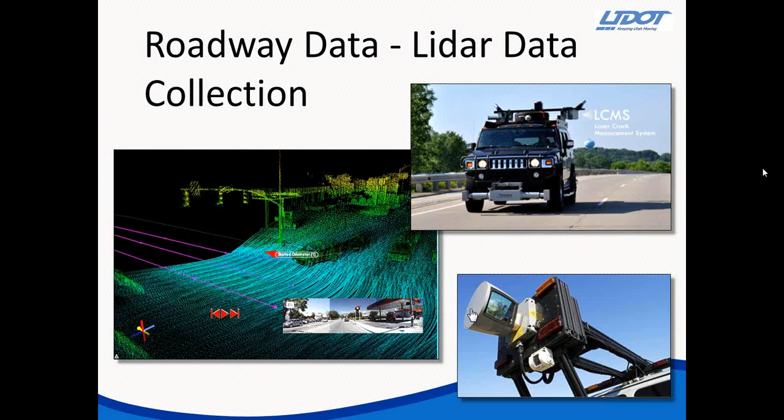We contracted with Mandli Communications. They chose to use Lidar as the primary collection tool, as well as some high-resolution right-of-way imagery as part of the data collection process. After the successful completion of the 2012 data collection, we've just completed a 2014 round of data collection, and we plan to continue on a two-year data collection cycle into the future.

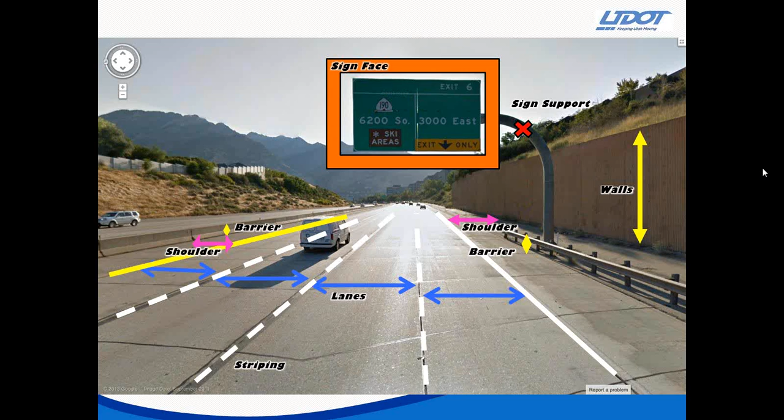To give you an idea of some of the roadway and roadside attributes we've collected with this project: we geospatially located all of our barriers, our shoulders and shoulder width, lane lines, lane width, sign faces including a description of the foundations and connectors, walls, wall heights and locations, median width, surface areas, location of rumble strips, all the pavement condition information, and roadway geometry.

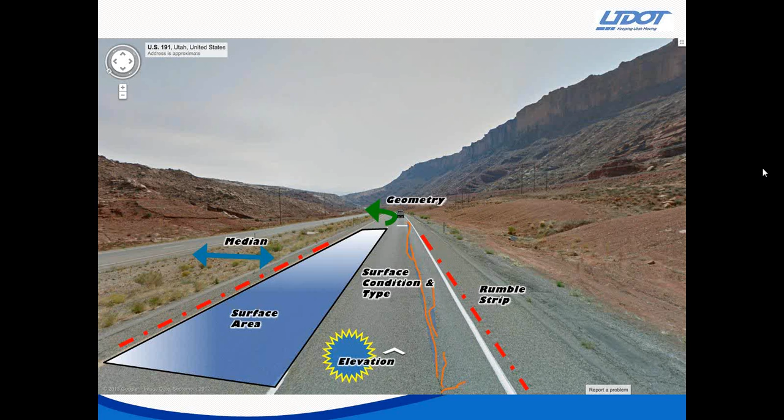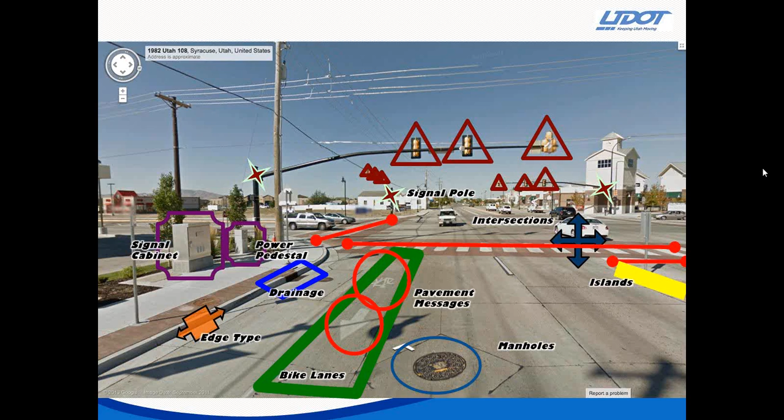Then in the urban environment, of course, things get very complicated and complex with intersections, other pavement messages, signal head locations, signal cabinets and power pedestals, drainage features, and curb and gutter. I think I've mentioned everything displayed on the picture.

So we took all of this data that we've collected and we've created a data portal. This is fashioned after the data.gov website. We've got our own version for Utah.

You can download these data sets as Excel spreadsheets, shape files, KML, KMZ, data dictionaries, and the metadata behind the data collection process—everything we could think of that we could provide is available here. And this is all available to the public as well. You're welcome to browse this at your convenience and take a look at what we've got.

We also display the information graphically in UPlan. UPlan utilizes the ArcGIS online data portal. We recognize the need to display this geospatially as best as we can in order to tell the story.

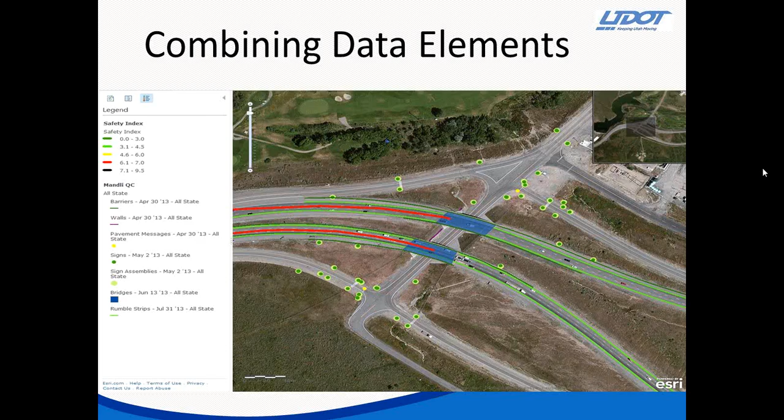So with that background, I'd like to talk a little bit about what we've done with shoulders. We did a systemic analysis of our state network to identify where we have deficient shoulders and where we might consider the prime locations for doing shoulder widening projects. Utah, by lane mile, is a fairly rural state, and we've got a lot of two-lane rural roads where the shoulders are in a variety of different conditions.

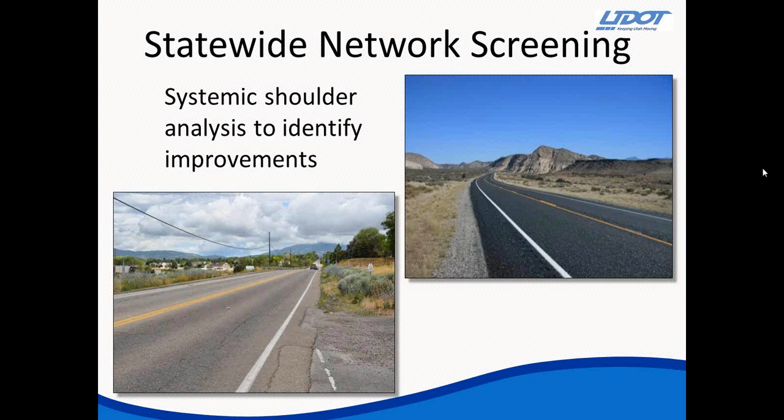Here's some examples on these pictures here. What initiated this project is one of our UDOT regions asked us for some federal HSIP safety funds to widen shoulders on a certain section of roadway, rural roadway, where they felt there was a safety concern.

And as the program manager for that program, I was concerned whether we were taking a holistic approach to looking at the entire network and truly prioritizing our greatest needs for where we should be spending our money to widen shoulders. Just as a teaser, the image you're currently looking at is the section of roadway where that region request came from. In doing our analysis, we found many of our two-lane rural roads that had a lot more deficient shoulders than what you're looking at in this picture.

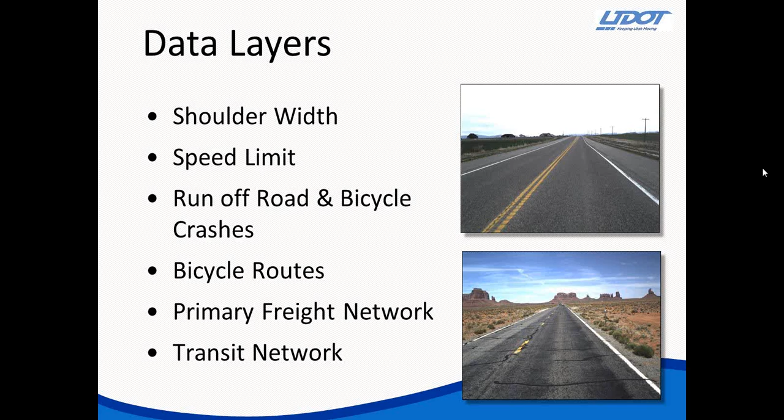So let me tell you what we did to embark on this project. We first identified several different data layers that we wanted to include in our analysis. I have a slide that talks about each of these data layers, but you can see them listed there that we identified as potential sources of information to help prioritize our shoulder widening. I'm not going to read that to you now.

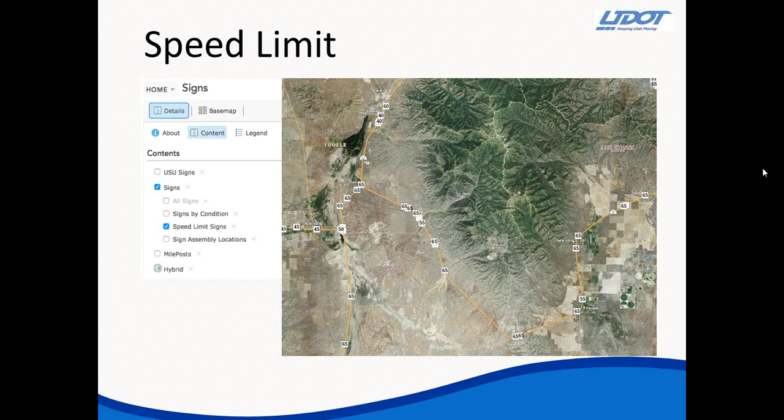We also looked at our crash data, both run-off roadway departure type crash data, as well as crashes that involve bicycles. We identified bikes as one of the roadway user types that would benefit from a wider shoulder, and so we wanted to make sure that we accounted for hot spots that may be occurring where bikes are being hit by vehicles. In this part of the analysis, we found that there were many more areas with roadway departure crashes than bicycle-involved crashes, but we used both as a weighting factor in our analysis.

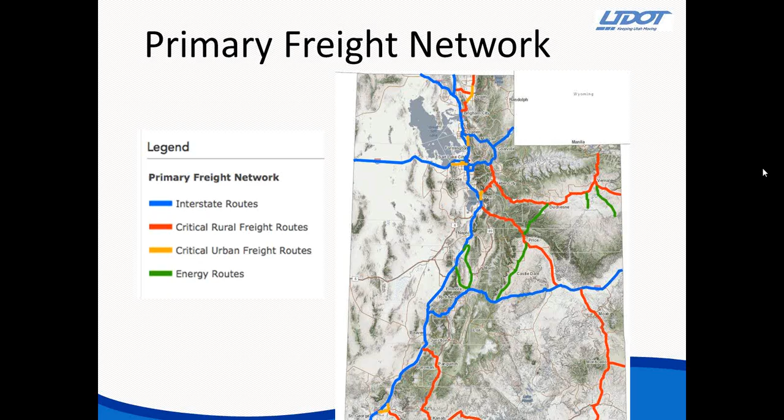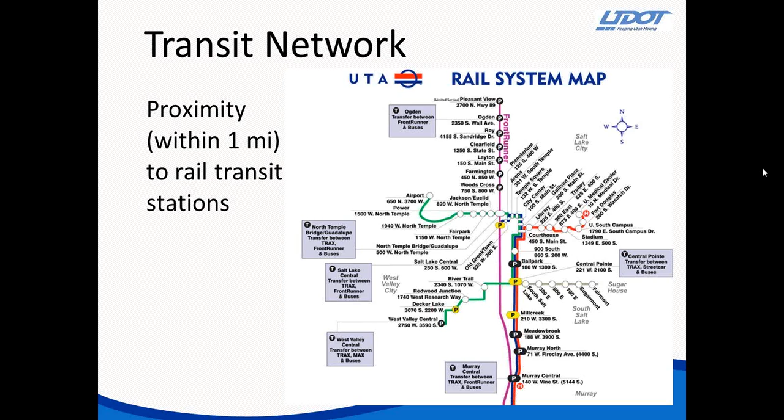And so we used this primary freight network as a contributing factor in weighting for our shoulder analysis. We also used proximity to transit stops. The theory here is connectivity between different modes of transit, specifically pedestrians, bikes, and transit, making connections between modes of travel, benefiting from good shoulder treatments.

So this slide pretty much summarizes how we combine these data layers together. We looked at our pavement sections. We identified the need to remove sections of roadway that already had existing curb and gutter. We did this for several reasons. A shoulder widening project can get a lot more complex if we end up having to buy right-of-way and shift curb, gutter, sidewalk, drainage features along the roadway. Since we were focusing primarily on shoulders, we removed sections that had existing curb and gutter, which was already identified in our Mandli data collection effort, so it was easy to remove those sections.

We also removed sections of roadway that already had shoulders over 6 feet wide, recognizing that 6 feet in some design criteria is still deficient, but for our purposes we wanted to identify roadways that really didn't have a shoulder that needed some type of treatment just to get started. We also removed areas in the urban area that had parallel facilities with shoulders, focusing on those true needs that were unique and isolated.

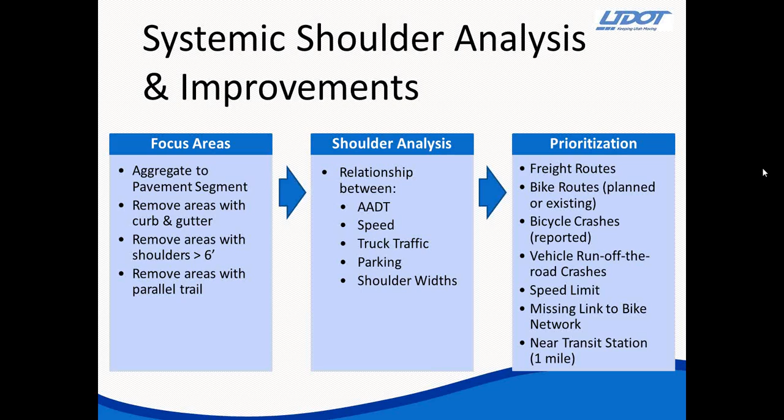So this is an output to our analysis. This is one of the corridors identified and prioritized. I'll show you a more complete list in a moment, but I wanted to demonstrate what kind of analysis and weighting factors we used. The weighting factors can be adjusted depending on what we want to focus on. This is an example of State Route 37, and how it ranked and prioritized based on those factors we talked about.

This wasn't a freight route. This was a high bike use route. There weren't any bike vehicle crashes, but there was a fair number of roadway departure crashes. Each of these scales on this scoring is 0 to 5. This was a fairly high speed road. It linked to other routes that already had sufficient shoulders, so it completed one of those networks, and it was near some transit facilities. So this section of roadway ranked very high.

Rudimentary cost analysis here for this section of road, for the areas that were deficient on the shoulders, is $1.7 million.

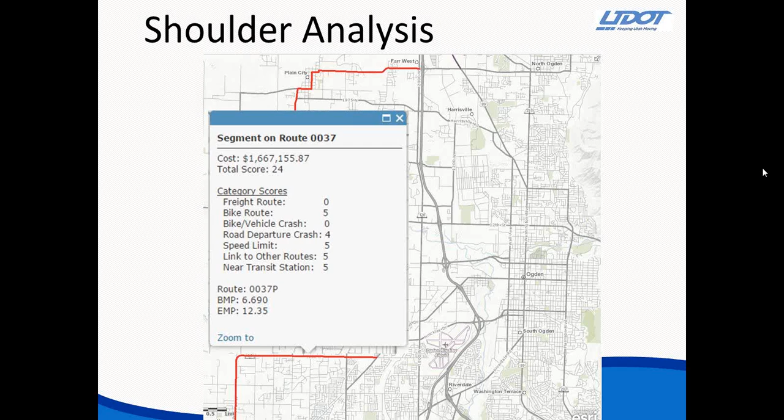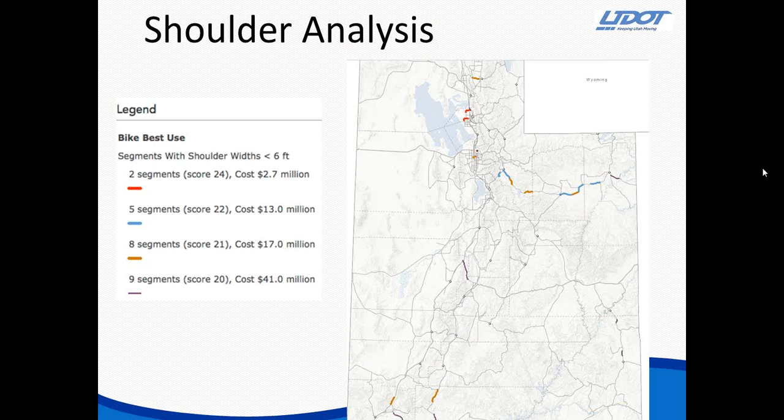Here's a map, again a UPlan map, of where we prioritize these top locations statewide, and there's some color coding here for how they ranked on that score. So this is basically the first $100 million program, if you will, of where to prioritize those projects.

One of those sections on that map was US 40, and I wanted to mention this route specifically because a significant portion of US 40 showed up in our analysis, and we thought this was really interesting. It's a pretty isolated road in the rural part of eastern Utah over some pretty treacherous mountain passes, and most of this road doesn't have any shoulders. One of the reasons this road as a network appeared at the top of our ranking was because it hit all of the key features of our ranking criteria.

High speed, it's a freight corridor, lots of crashes. It's designated as a primary bike route. There are no alternate facilities in this area for transportation.

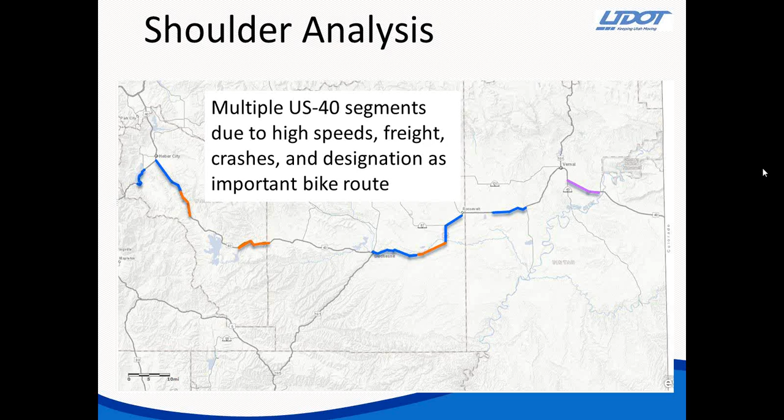And so you could see how the way we scored and chose to rank favored rural roads like this that were heavily used by trucks. By tweaking that ranking criteria, we could find ways to better optimize this if we didn't want to focus on roadways such as this.

So here's our final list that we prioritized statewide, and we created this list that we are sending back to our regions as this is what we prioritized in our analysis of the top candidates in the state to widen shoulders. Please get with your local people and let us know which of these you'd like us to consider for funding.

Lessons learned in this process. You obviously, first of all, have to start off with accurate data. We found as we went through this several sections of roadway that we had to throw out of the analysis because when the data was collected on those sections, they were under construction or otherwise had some temporary traffic control set up. So the roadway features collected at that time didn't represent what's typically on those sections. Some sections came up as having no shoulder because traffic was shifted onto the shoulder at that time to accommodate construction activities.

As with any process such as this, when we handed the list back to our regions, we had to remind them that this wasn't the final outcome of the process and that some ground truthing had to take place in order to get buy-in and to confirm that what was concluded in the statistical analysis actually bore fruit on the ground.

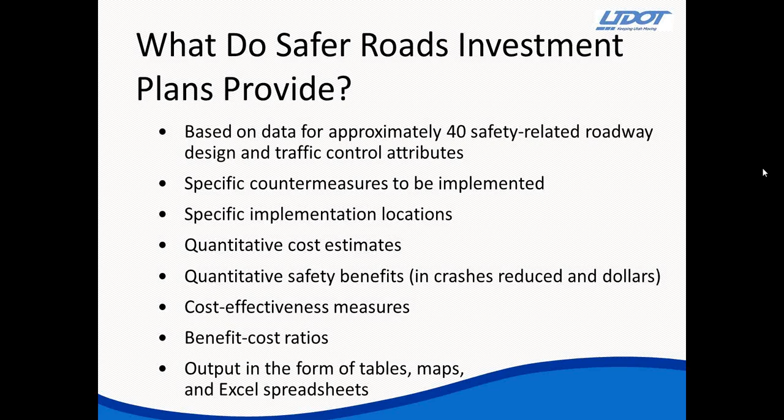So with that, I'm done with my presentation.

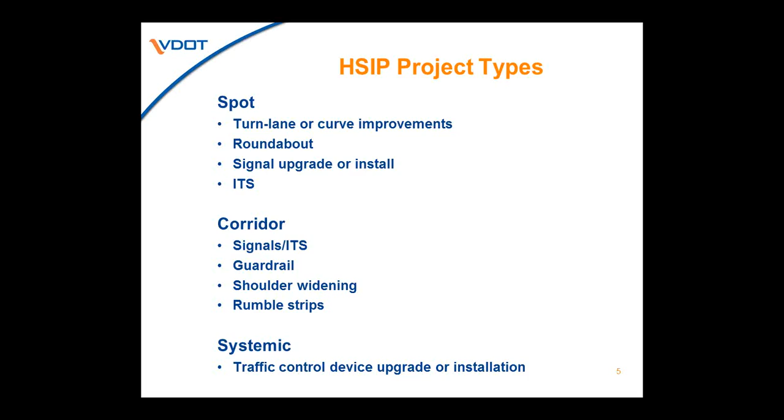So we've been working with our district folks using this umbrella approach with our strategic plan for several years now. The intent was to get them good highway safety planning data for our emphasis areas: roadway departure, intersection-related, speed-related, and bike and ped.

Although our plan doesn't identify non-motorized crashes as an emphasis area, each of our other areas is actually intertwined with strategies that address those issues, whether related to crossing at an intersection or driving along a roadway segment that has roadway departure and speed-related issues.

We've been working to improve how we share that information over the last 4 or 5 years, as we've moved from a legacy mainframe-driven linear referencing system to a more GIS-based system. That has required some of the steps I'm going to get into.

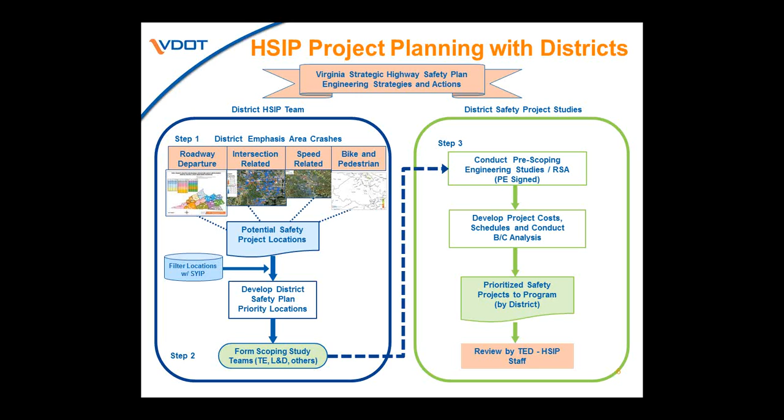One of the first things that we did in order to help the districts develop their highway safety plans is develop what we call a crash tree. Again, this is another good idea from one of the states that starts with M, who has done this down to the county level.

We developed these district crash trees, starting with the VDOT maintained system, of which we maintain 85% here in Virginia, with about 60,000 centerline miles of highway. We have our VDOT system - the green to the left is our interstate system, in the middle is our primary or state system, as it would be called in many other states.

And then on the right in the blue is our secondary system, which is our county roads. For each of those, the first decision was for our primary was whether or not it was divided or undivided. Although we had a number of lanes, and although while we had that for secondary, the preponderance of the centerline miles is 2-lane roads, right down to the subdivision cul-de-sac. So for our primary system, we pulled our number of lanes out of our inventory, and then we started to look at the distribution of crash types.

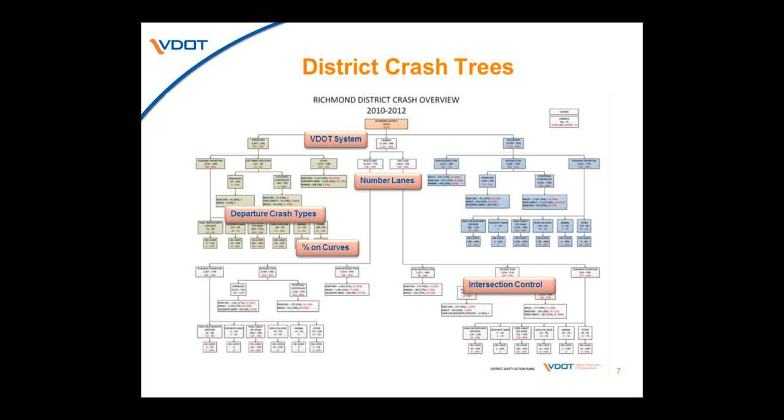So while we were changing from having this legacy sort of mainframe crash and inventory system, we were able to take the data sets out of there and start to work with crash frequencies. As Scott did for his shoulder work, we started back with looking at where were our emphasis area from our strategic plan crash frequency issues. Our old legacy mainframe generated reports for intersections and roadway segments that had an above average crash rate using the critical crash rate method.

As we were transferring to a completely GIS-based enterprise system, we went back to a frequency method. Our approach was to look at those intersections and roadway segments within each county. So what we did was we percentiled the total crashes and the severe crashes for those at both intersections and for the roadway departure, speed-related, and bike and ped. For all but bike and ped, we tended to look at the top 85th percentile for the route length within that county or the 250-foot radius around an intersection node. For bike and ped, we quartiled those so that we could get enough frequency in each data range to look at which routes had those non-motorized crashes.

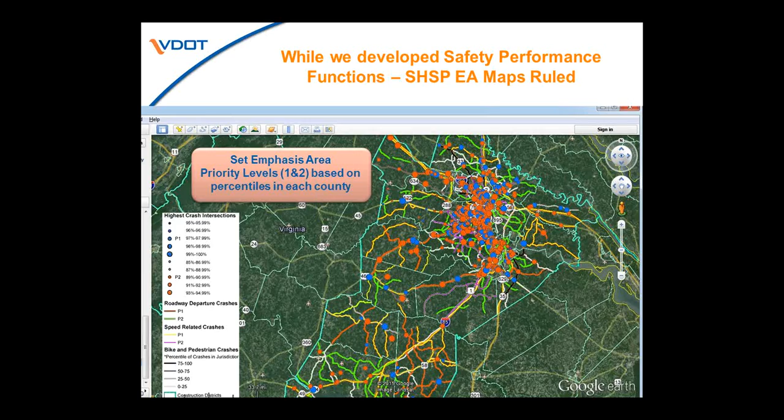The next year, we took the data and started to talk to the districts about working with their safety partners. We took the same data and overlaid the proportions of the different driver behavior emphasis areas. For our intersections, we created a pie chart of the unbelted, DUI, young driver, and speeding crashes, and then bar charts for each of those roadway segments with roadway departures, and created data-driven maps for each county that you could zoom into with the PDF for everyone in the district to see and share with their partners.

So we thought this was a good place for our engineers and planners to talk to their partners as they were meeting with them on a regular basis anyway.

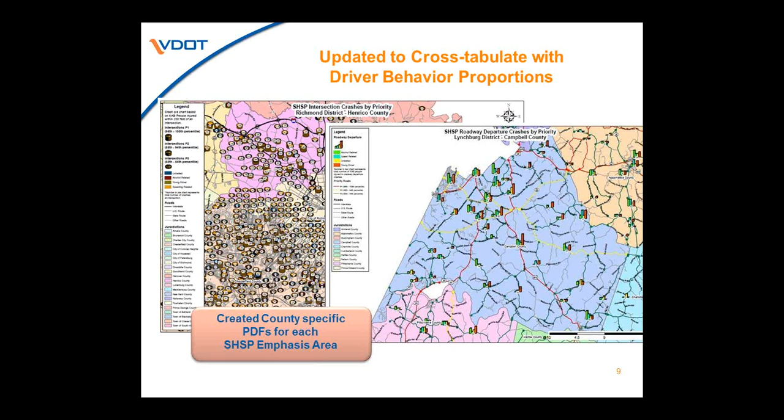The next year, we started to work with ArcGIS Online, that Scott also mentioned, with their data set, and we started to make interactive maps of the same information. This allowed us to present not only the driver behavior but also the collision types as pop-up information for each of the segments and intersections.

So with the interactive map, and in our case a password into ArcGIS Online, both our districts and our partners were able to look at the issues that they wanted to prioritize and target.

So while this was all going on in terms of frequency-based data analysis, presentation, and distribution, we were busy generating safety performance functions using the new methodologies being published through research to develop the Highway Safety Manual, and also the Safety Analyst software that was being developed through a pooled fund study at the time, and is now the AASHTOWare suite of tools for safety.

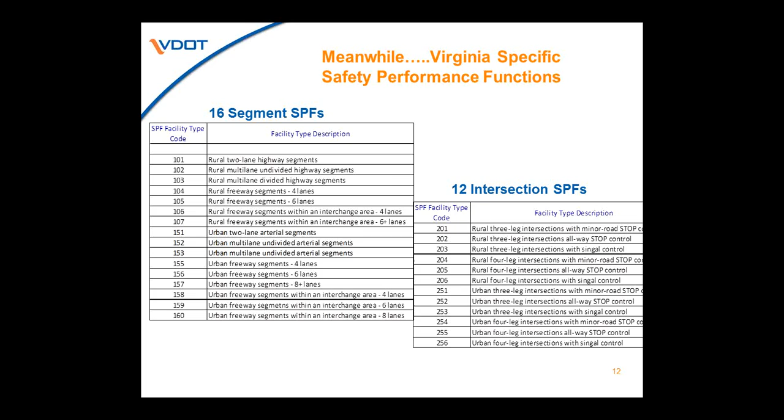For each of those SPFs, we have a performance curve for total crashes as well as for fatal plus injury crashes. Here's a couple of examples of what we have for performance in Virginia.

Rural multi-lane divided is more of a curved type presentation than the linear one that is the default now in Safety Analyst. You can see the different curvature that we have in Virginia for rural four-leg signalized intersections as well.

So with this information, we're able to essentially normalize for traffic volumes and determine the crash frequency per mile, or the crash frequency within that 250-foot radius around each intersection node.

Any existing traffic crash history that is above that curve is considered to be a location that has potential for safety improvement. In essence, what we attempt to do is reduce those crashes so that they are below what is normal or average for that given segment or intersection site subtype.

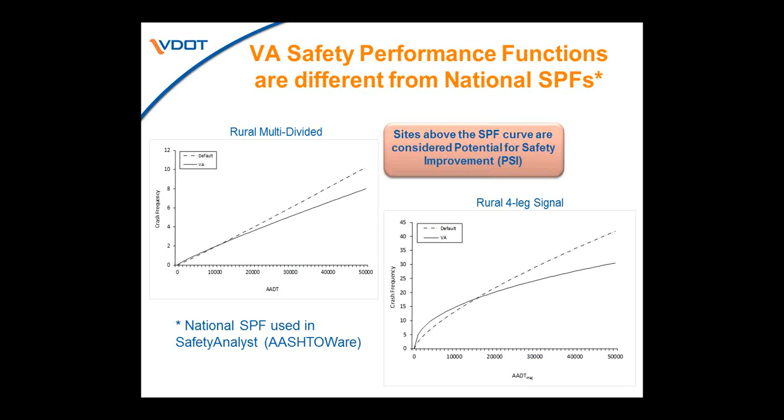Since we have been developing a more robust data set for our crashes, as we were finishing those safety performance functions, we decided to look at 3 years of data and actually look at the cross-tabulation of those sites that had a total crash PSI greater than 0 and a fatal and injury crash PSI greater than 0.

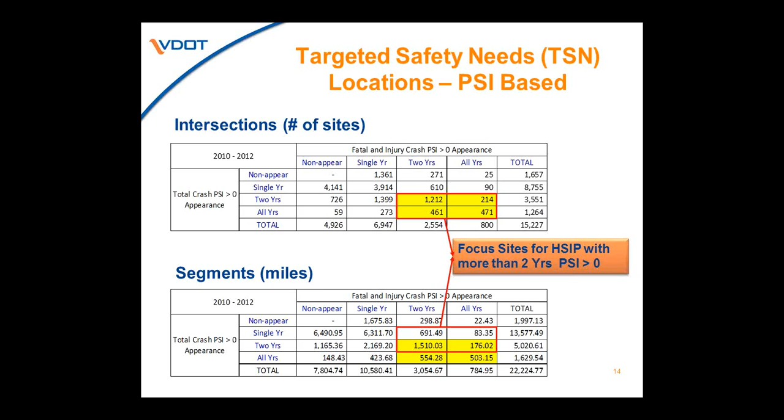In essence, our attempt was to find where we really need to target our resources. So as you can see here, we looked for those sites that had more than 2 years of identification of being above average with both intersections and segments.

One thing that we have in Virginia, since we do maintain all those roadways, is very good traffic volume data, which allowed us to generate both those PSIs and then give us that information to post back for diagnostics of the site.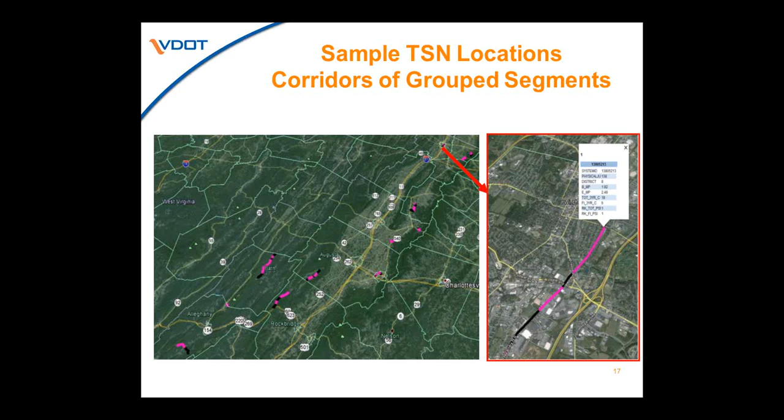However, although we had these long route segments identifying roadway departure, speed, and bike and ped, and we had our intersections both for frequency and adjusted for volume, we knew we needed to get a little bit more specific, in particular for roadway departure. Like many states, we are a focus state for Federal Highways for roadway departure, with over 60% of our fatalities being from those that depart their travel lanes. Here's just a snapshot of the roadway departure issue here in Virginia.

It's very dispersed. Each district has about 1,200 miles where we have most of our roadway departure crashes, and they're randomly distributed. If you look at this statewide, it ends up being about a third of them are on 3/4 of the network. In most cases, that's the rural 2-lane, low-volume roads, our secondary system.

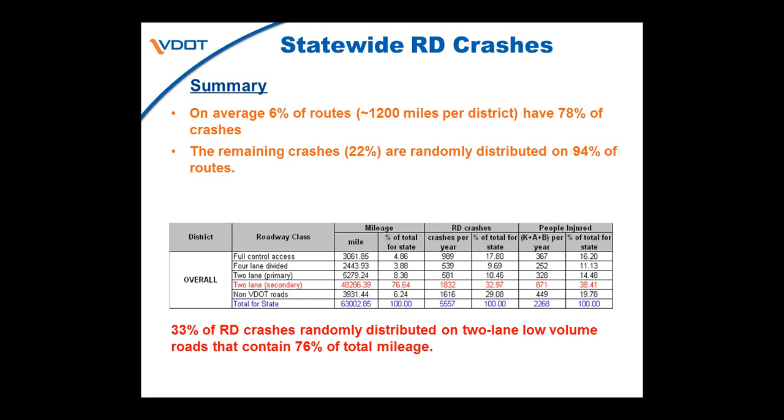So we were grateful to have Federal Highways come with their roadway departure team and work with us to develop a methodology, as they had done with probably a dozen other states, to identify how to better target countermeasures for roadway departure. This was essentially the approach: move from our traditional, higher priced corridor countermeasures to some more systemic, lower cost countermeasures. Of course, not forgetting those higher priced ones like shoulder widening, with the intent that things would move, as they did for rumble strips on interstates in our case, to being more of a standard and policy decision in terms of implementing those countermeasures and treatments on a broader extent of our network.

Federal Highways has now developed a lot of resources and tools on their website. If you search for systemic there, they talk about the approach and provide tools and help from what's been done in several other states, primarily looking at targeting those different roadway departure crash types—in our case for systemic—what are those risk factors, and then screening the network based on that to prioritize where are the locations we really want to address the problem.

The countermeasures that are selected come out of identifying those crash types and risk factors, and that will hopefully help us to prioritize projects moving forward.

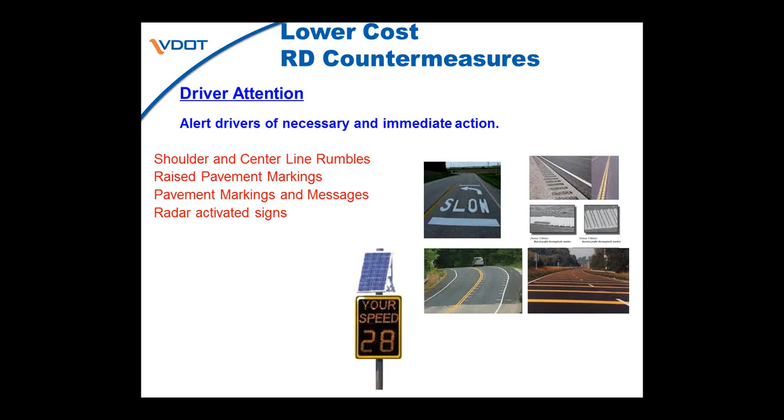And finally, how do we enhance vehicle stability? There's been a lot of work recently with states using high friction surface treatments, whether that's with their overlay program or applying the special epoxy-based friction course on those curves and intersections that deserve higher friction. And finally, the pavement wedge, called the safety wedge by many folks, providing a 30 to 40 degree slope with the paver, so that if the shoulder was to become rutted or washed out, folks could recover if they drifted off the edge of these narrow secondary roads that we have.

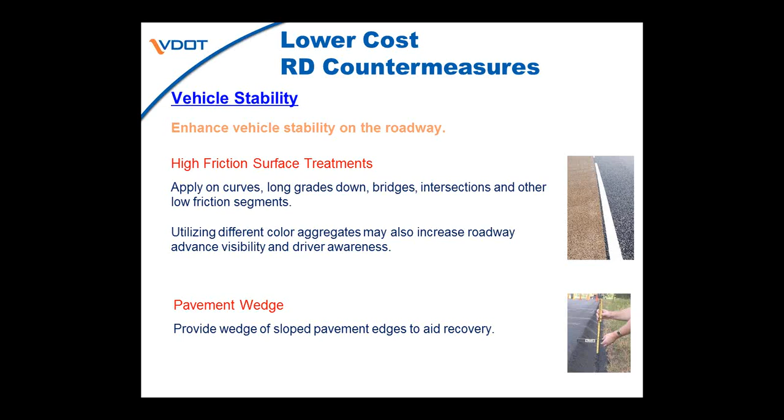This plan involved looking at those crash types, setting a crash threshold for our locations, and then looking for those locations along each corridor so that we can prioritize and study them in more detail. Much of this information needs to be ground truthed before it's ready to be developed into a project. In our case, we're trying to get the district to think about not only safety, but also construction and maintenance projects that overlap with these locations.

For example, we set a threshold for rumble strips at 4,000 vehicles a day, and said that any road with a roadway departure problem, center line or run off the road, over 4,000 should be reviewed for rumble strips. Then we looked at a crash threshold for roads under that volume threshold.

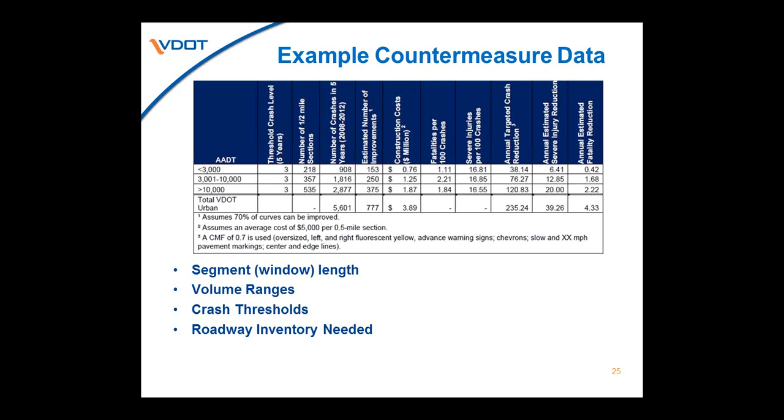You might not be able to read this screen capture from the spreadsheet, but suffice it to say that we had 16 or 17 different countermeasure packages, each categorized based on functional class and ownership as to where it is. So we had a rural versus urban designation, and then VDOT maintained and owned versus non-VDOT.

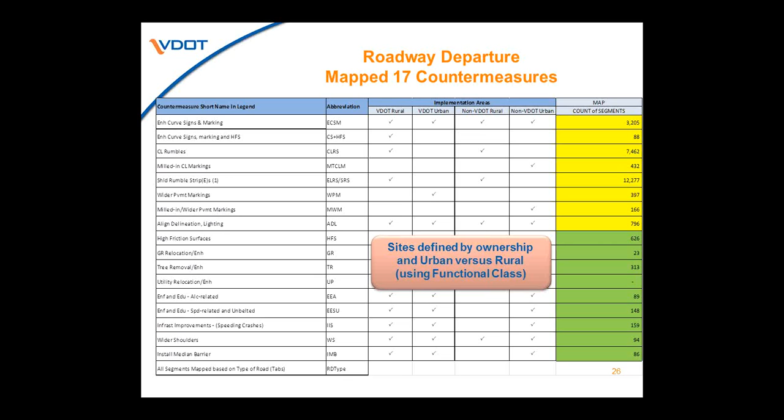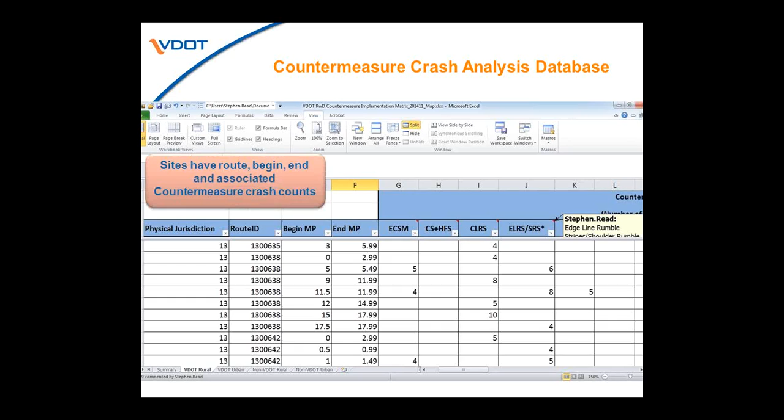With each of these, we're able to find those segments and also identify whether or not we had one of our PSI volume-adjusted segments that overlapped. We set up the spreadsheet and our maps to indicate that, as well as provide a tracking tool to determine when a given roadway corridor was investigated and reviewed, and whether any of the treatments were recommended for a project.

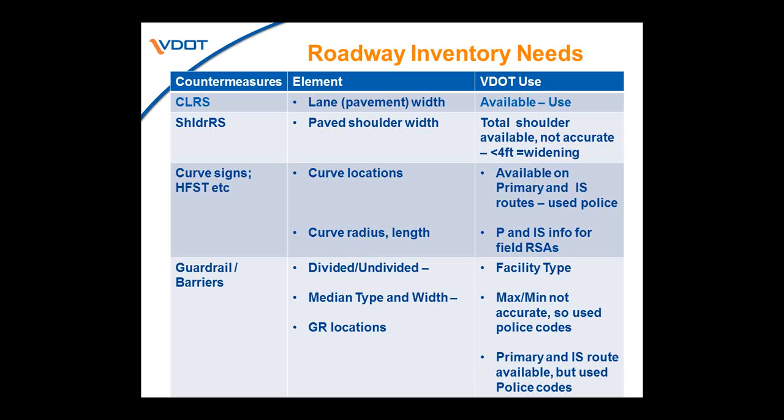And so for each of these, it allows you to turn off and on the different data set layers. Here in this case, we're sharing KMZs with the district staff in order to prioritize the corridors that they're interested in.

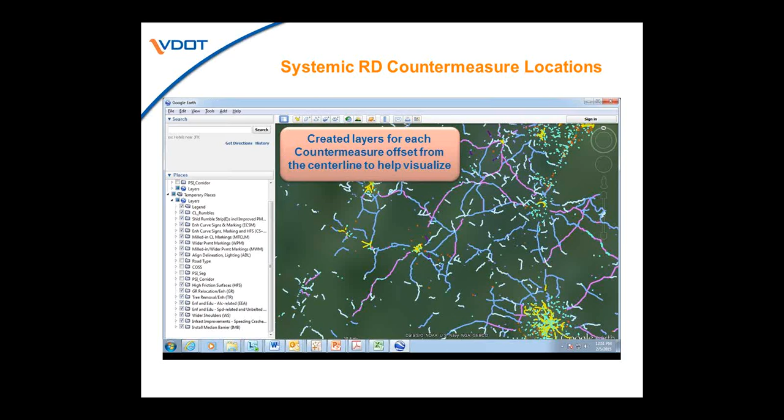To do that, we created a combined layer which we called road type. Essentially this is any location where any of the potential countermeasure segments were identified, to see if they could address this more on a corridor basis and not countermeasure by countermeasure.

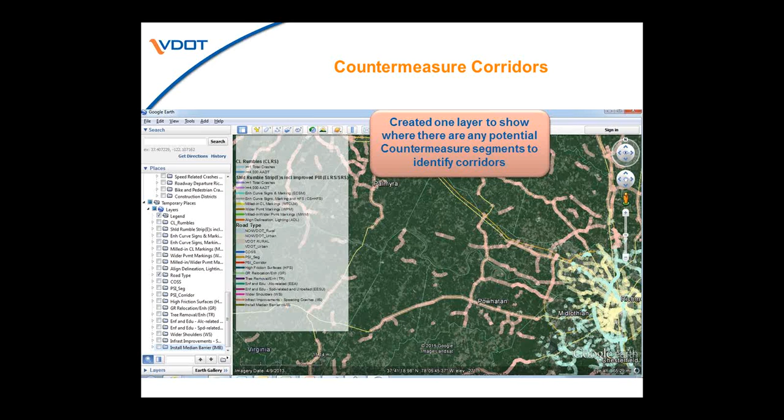Finally, as I showed you on the spreadsheet, we have the data layers there for our PSI segments and corridors. As you can see here, there's a few red corridors identified just south and west of Richmond. So in essence, they could see if those segments overlapped, being adjusted for volume in terms of being above average.

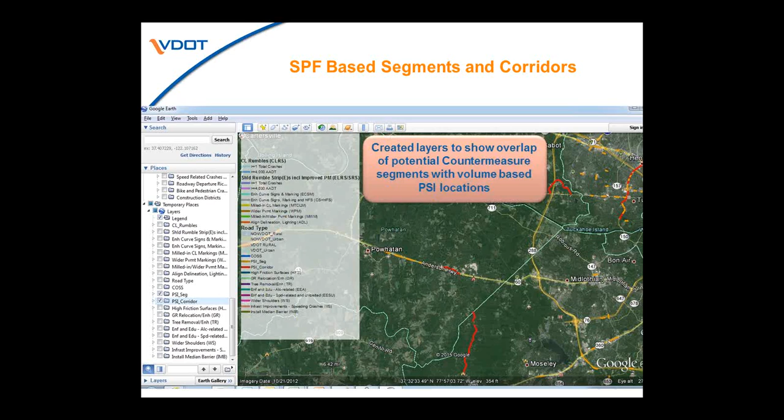So to wrap up, where are we headed with this? We are at the point now where we have shared this information in the past few months with the intent that the districts focus on what we have designated here in Virginia as the corridors of statewide significance.

These corridors are a subset of our national highway system and are predominantly all of our interstates and parallel primary system. If there is not an interstate serving that market sector of the Commonwealth, then like the green line across the bottom, US 58 is identified as a corridor, as is the east-west blue corridor of US 460.

And so these main routes will be our focus, predominantly to look at where we can do those lower cost systemic traffic control devices, but also look at where we may need to have some more corridor-based, higher cost, more benefit cost-driven shoulder widening projects.

So we've developed templates for our field staff to use, and essentially looked at the MUTCD and different countermeasures out there to determine what are the minimum requirements moving into a second and third tier of enhancements for traffic control, shoulders, rumble strips, and so on for different locations along the network.